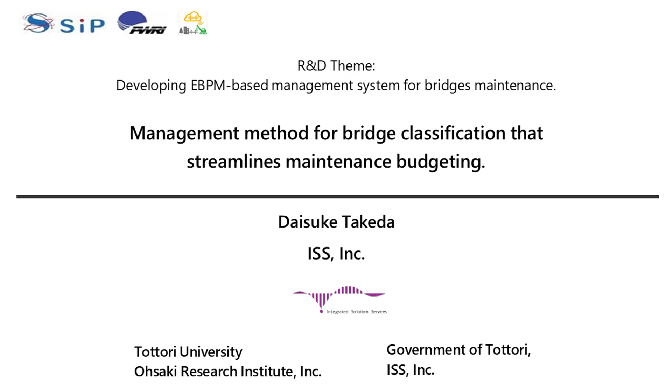Today I'm going to talk about the bridge classification, which Mr. Wakahara has already referred to. So I'm going to explain in a bit more detail about the bridge classification, which is one of the key techniques of our R&D project for the management of bridge maintenance. Mr. Wakahara, Mr. Rita and I work on the same team, so some of the sheets are the same as their presentation sheets.

So to begin with, let me explain the practical field that the new system we are developing is targeting: Tottori Prefecture. Our R&D project, SIP, Strategic Innovation Program, emphasizes that the R&D should finally be implemented in the real world and used practically, not just R&D in the laboratory.

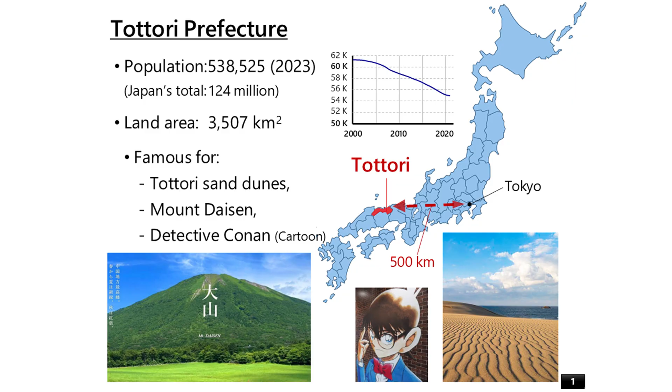So Tottori is local countryside, and the place is famous for sand dunes, Mount Daisen, and good food such as crabs, pears, chickens, or beef. And it's 500 kilometers from Tokyo. I guess this is about the distance between Bucharest and Istanbul. The prefecture's population is the smallest among all the areas in Japan, and moreover, the population has been declining in these 25 years. Population decline means tax income decrease, and even in this situation, the infrastructure is getting old.

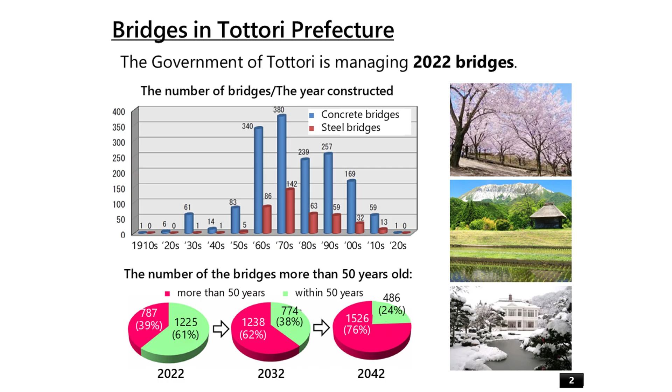Let's see the bridge management situation in Tottori. The Tottori government is managing 2022 bridges, most of which were constructed in the period from the 1960s to 1990s. That means most of the bridges will be more than 50 years old in the 2030s, and that will come soon, actually, just like me. As construction was done in a short period, in the 60s and 70s, the deterioration will occur in a short period. The bridges must be maintained well, not to deteriorate and lose their function.

But the budget is limited and local human resources are getting shorter. Also, some bridges are difficult to repair if the bridge has heavy traffic and the traffic cannot be interrupted by the repair work. This is the situation, and it's not only in Tottori, but the same in local areas all over Japan, or maybe the world.

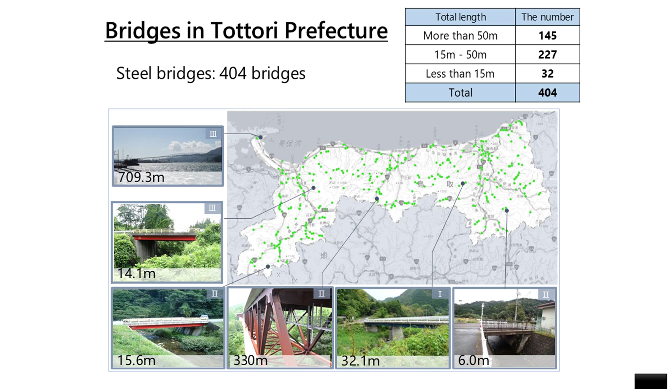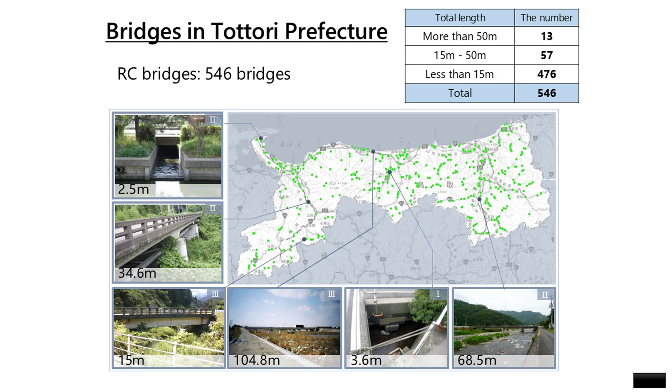I'm going to show the bridges in Tottori by each structure type. So they have 404 steel bridges, like these. This is the shape of Tottori. 520 bridges are precast concrete bridges, and 546 bridges are RC bridges. And box culverts, 552 structures. I don't know whether box culverts are categorized as bridges in Romania, but we do in Japan.

Let me add one thing. Those are the bridges that are managed by the Tottori government, and there are more bridges in this region because many other bridges are managed by local municipalities. And again, their budgets are limited, and more limited than Tottori Prefecture's.

So I'm going to explain the classification system we are developing, but I guess many in the audience today are wondering, what? Bridge classification? Isn't it a normal strategy? Many municipalities are practicing it already, aren't they? Yes, that is true. The same in Japan. Many governments have their classification already.

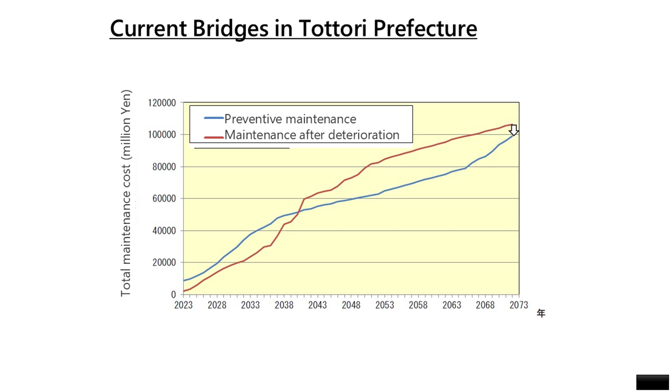But the issue is those classification systems are not connected to the political or governance aspect. And because of that, maintenance is not done, let's say, strategically. To address this situation, a classification set using scientific evidence is what we are developing. And with this system, the government can achieve evidence-based policy making, EBPM.

This is the maintenance cost estimated in Tottori until 2073, 100 billion yen from 2023 to 2073. It's about 2 billion a year, and this estimate is made based on the current classification system, and we are trying to make the budget lower with the new classification system. So this is the current plan, and we are going to try to change it.

So to set the classification system, first we evaluate the bridges. To do this, we are developing a system which we call the public asset platform, this one. The platform accumulates, like these layers, information that affects the value of bridges in a geographically integrated form. As we choose the information or data elements, we focus on two aspects. The first aspect is the normal occasion, and the second one is the disaster occasion.

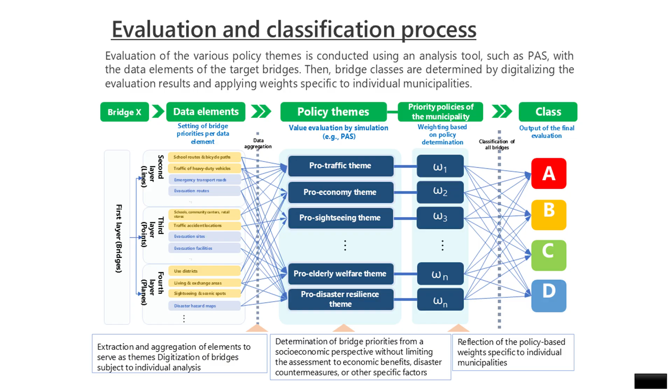So in the calculation, the effect of each data element will be different, and that will be decided along with policy themes. Like if the government's focus area is, say, economy or sightseeing or regional resilience for disasters, that kind of element will be highly evaluated in the calculation. By this process, we will evaluate the bridges.

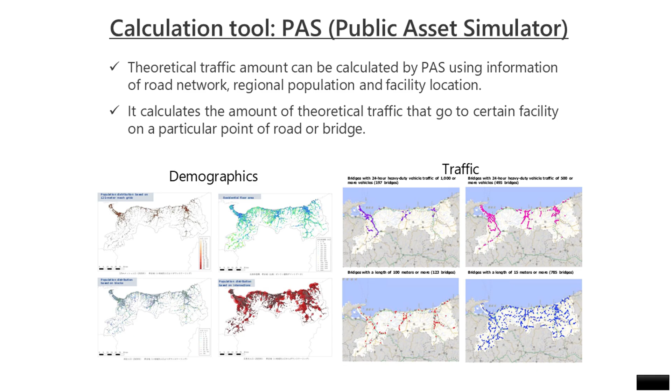And the calculation will be done with the program PAS, which Dr. Fujita referred to. PAS is Public Asset Simulator, which can calculate theoretical traffic amount. This program uses information of road network, the regional population and facility location, and calculates the amount of theoretical traffic that goes to a certain facility on a particular point of a road or bridge.

Also, other related information can be input to the PAS program. So these demographics are input to the PAS program, and then traffic is calculated. So let me say it again. The theoretical traffic is the traffic that goes to a certain facility which the programmer chose, and for a point of road or bridge, the traffic for that point will be calculated.

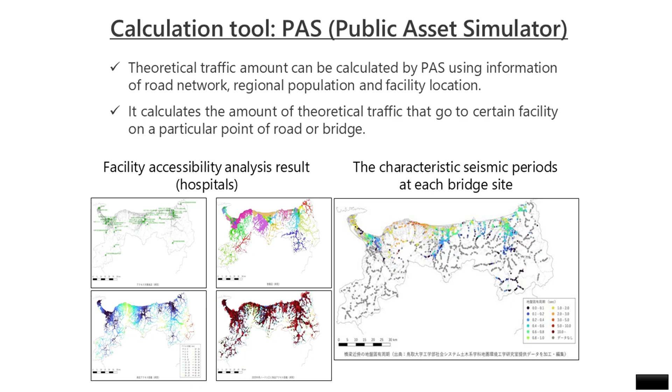And again, this is the facility accessibility analysis result. The characteristics, seismic period at each bridge site. Those data have been input to the PAS. And using the PAS, we have resulted one of this classification model, currently at the concept stage, and I will explain the concept of each class.

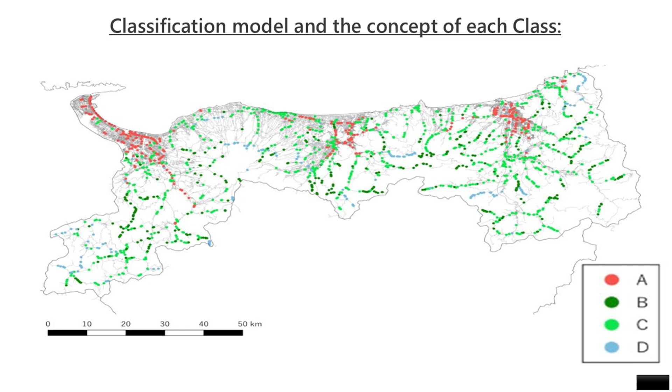Yes. Oh, sorry. So this map shows the red points are the bridges with class A, and the green and blue colors show B, C and D. This is plotted on the maps. And class A bridges are the top 20% rank bridges, which cover 80% of traffic in Tottori. This shows ranking the bridges by the traffic amount.

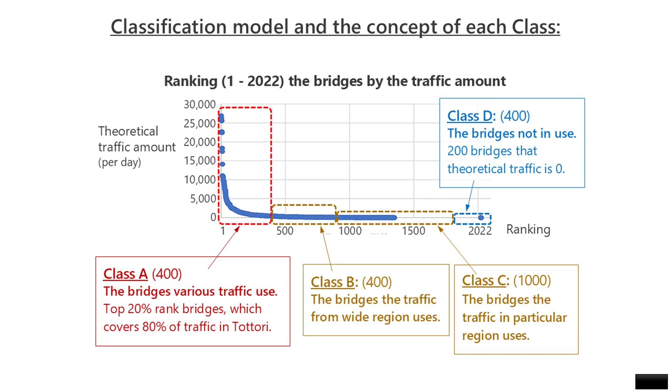And a very small number of bridges have a high traffic level. So this is the shape this kind of effect shows. And on the other hand, class D bridges, the theoretical traffic is 0. So it's theoretical traffic, so sometimes some bridges have 0 traffic theoretically. The bridges are not in use, I can say.

Class B, the bridges that traffic from a wide region uses, and the bridges that the traffic in a particular region uses, are in this area. So we set some political themes such as the region that supports elderly people's life, and along with that theme, we chose some facilities as destinations of the traffic and calculated the traffic amount. So this is a result of the calculation of the traffic.

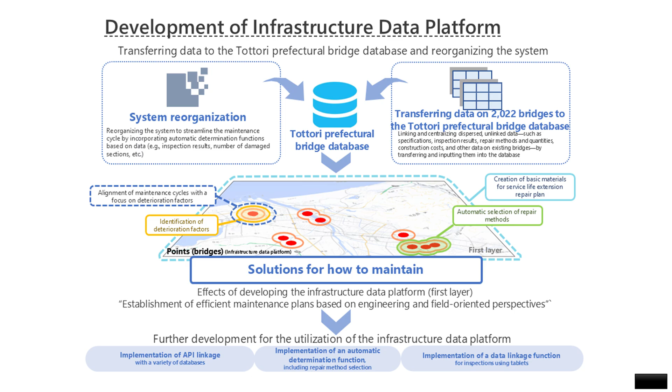If I simply say, the maintenance cycle consists of inspection, evaluation, design, repair, and inspection again, and so on. Actually, we are developing the public asset platform I referred to already, and also the infrastructure platform. With both platforms, we are making the database, which I'm not talking about today, but the two platforms and database will work to decide which bridges must be which class and how to maintain them. We can decide, and we can decide the budget.

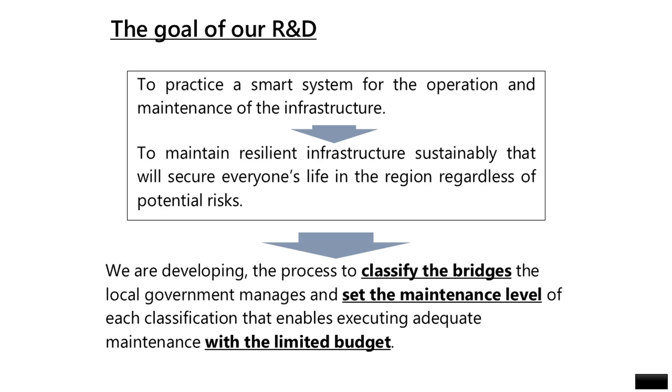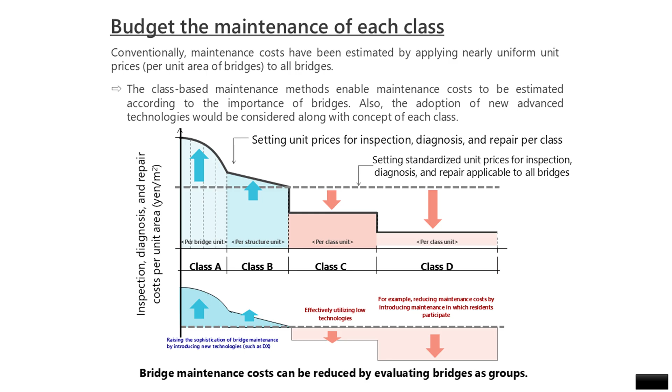So let me wrap up my presentation by showing our R&D's goal again. We are developing the process to classify the bridges the local government manages and set the maintenance level of each classification, which enables executing adequate maintenance with a limited budget. To do this, we maintain resilient infrastructure sustainably that will secure everyone's life in the region regardless of potential risk, and practice a smart system for the operation and maintenance of infrastructure.